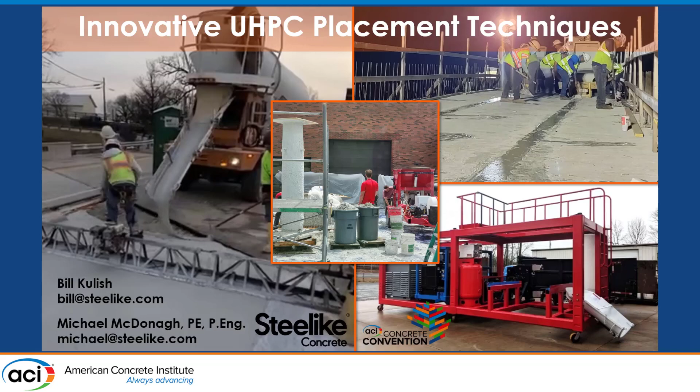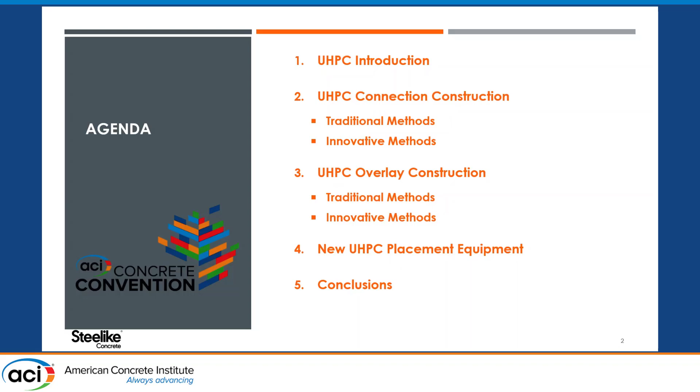First, I'm going to do a very brief introduction of UHPC. Then I'll talk about UHPC connection construction, how it's typically done, our innovative methods, and then do the same for overlay construction. I'll also give a brief introduction to some new UHPC placement equipment that Steelike has manufactured, and then wrap it up.

Now, this session is the third session on UHPC, but nobody has gone back to the basics as far as what is UHPC yet. So I'm going to take the opportunity. I'm sure there's somebody in here who cannot tell me what the typical rapid chloride test result is for a UHPC. Am I right? I see some people smiling. All right, so I'm going to keep it brief.

UHPC is a fiber reinforced cementitious composite, typically with a very low water to cement ratio. We're looking at less than 0.25. The values in yellow or orange would be typical values for conventional concretes used in bridge construction.

22,000 psi is a typical 28-day strength for UHPC. There's significant tensile strength, which depends on the quantity of fiber, and strain hardening, which we've already discussed today. In terms of durability, for a rapid chloride test, typically less than 250 coulombs is considered a requirement for a UHPC class material, versus 1,000 being considered a really good value for conventional concrete.

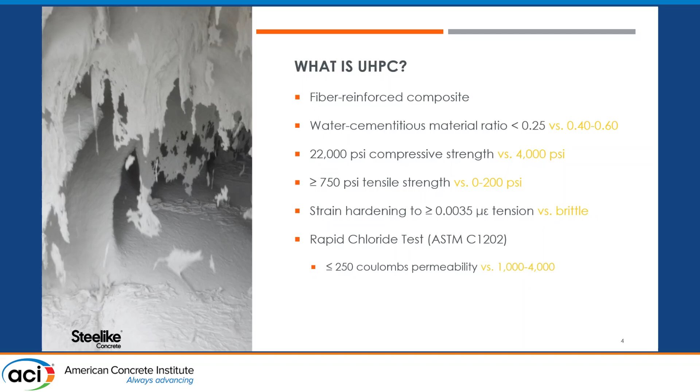I want to also briefly touch on Steelike UHPC, because these innovative methods we've developed, we've only used with Steelike UHPC. So there's a chance there's something unique about Steelike that allows it to happen, or maybe just others haven't tried it yet.

Very briefly, Steelike UHPC meets the Federal Highways definitions and pretty much every agency out there. We're pre-qualified in a number of states, and we have premium properties, which I'll explain in a second. Steelike is also relatively unique by being all white, and we have flexible mixing options and unique placement techniques, which is what I'm going to go into in detail today.

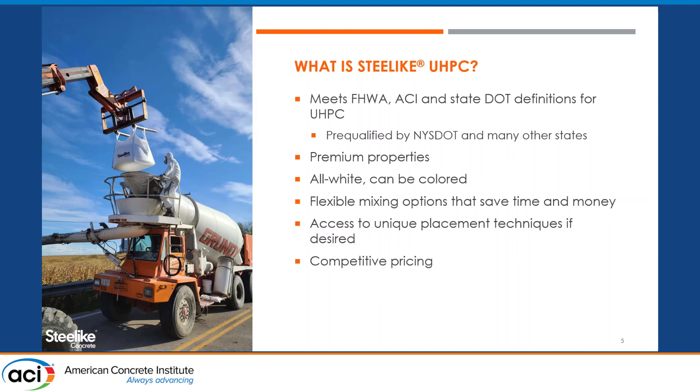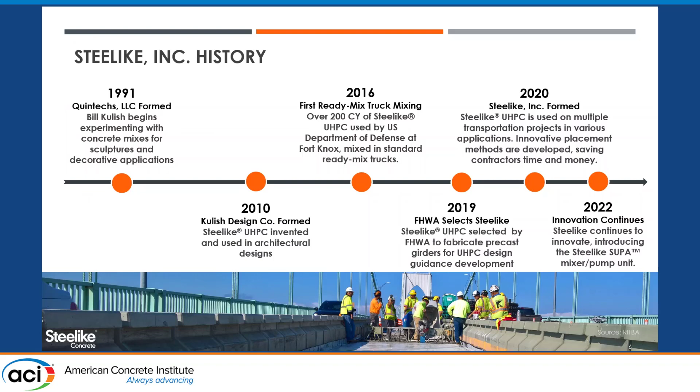Steelike traces its history back to 1991, but Steelike UHPC as we know it today really came together around 2010. 2016 was kind of our breakout year, with a significant project with the U.S. military, and our growth has continued since then.

So my comment about premium properties - on this table on the right, I have lower and upper bound values established by the Federal Highways or New York State, who's been an early adopter, and several properties on the left.

Compressive strength - we've had some lab studies that take our material as high as 27 KSI. Shrinkage, we're certainly on the low end of the range; it's fair to say Steelike is a low shrinkage UHPC. We're extremely low on chloride permeability, and for freeze thaw, our material actually gets stronger as you do the testing, whereas the limit is that it can't degrade beyond 96 or 98% from baseline. And scaling, we don't experience any scaling.

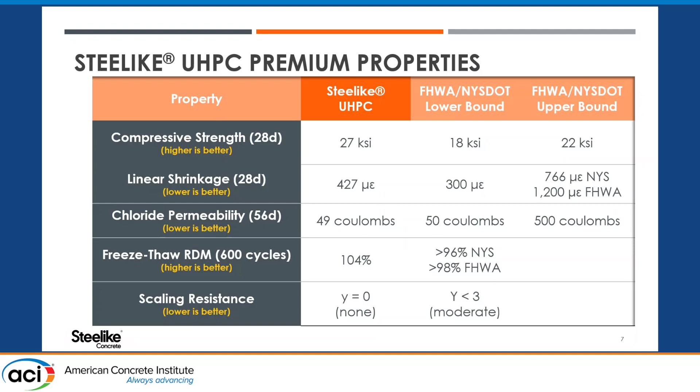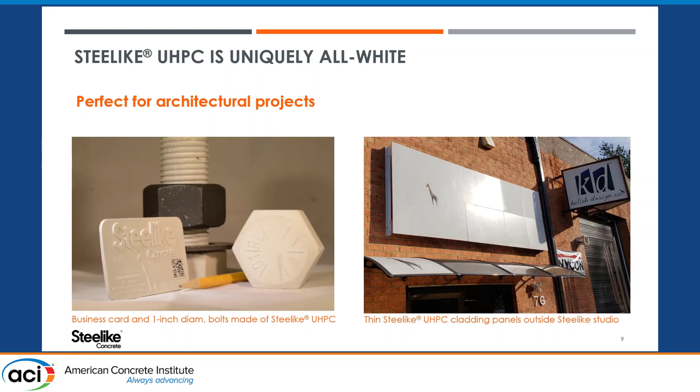Then the connections are placed, then top forms are placed on the connections, since bridge decks are never level in both directions. This prevents the material from running away on the low side, but it also has a secondary effect of trapping air that may be getting displaced or escaping out of the UHPC.

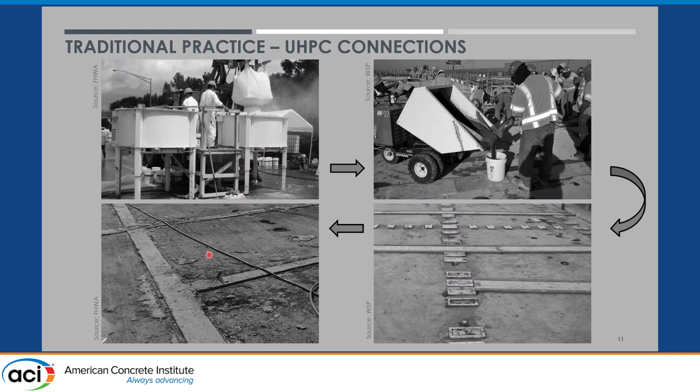So most agencies then say, okay, if you're going to top form, we need to set those forms high, so air that gets trapped as it works its way up is above the deck cross-section. And so when you remove the forms, the bottom left is what you see, and that has to be grinded off.

So with that as the baseline of traditional UHPC construction practices, now I'm going to introduce the innovative methods that Steelike has developed. The first method, key to several other follow-on benefits, is using standard ready-mix trucks for mixing UHPC.

Number one, you eliminate the need to transport specialty mixers around the country to job sites. These trucks are locally available, and they have very large batch sizes. We can mix up to 7 cubic yards in a single batch, versus the typical mixer used for connection jobs, which maxes out around 0.6 cubic yards, with smaller versions from there.

This is something Steelike has been doing since 2015. We've batched well over 1,500 batches in ready-mix trucks, never had a failed batch, and we've done it in all conditions: hot, cold, wet, dry, you name it. So it's a reliable method that we employ as our default whenever we can.

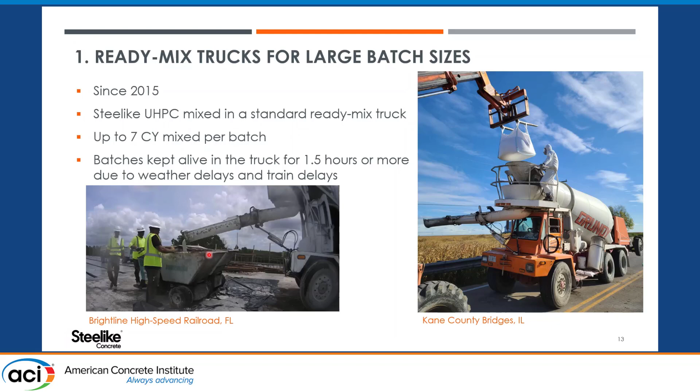We've even managed to keep batches alive when disruptions to projects occur. The slide says an hour and a half or more, but we've actually gone as much as 2.5 hours, and we might be able to go further, we just never have the need. So that eliminates any fear of having such a large batch go bad. There's a lot of money in those 7 yards, but that's never been a concern for us. We have the tools at our disposal to prevent that.

A follow-on benefit of using a ready-mix truck to mix is that the truck is inherently mobile, so now we can eliminate buggies. Buggies can be rather inefficient, they require buggy drivers, you need multiple of those, and they generate a lot of waste.

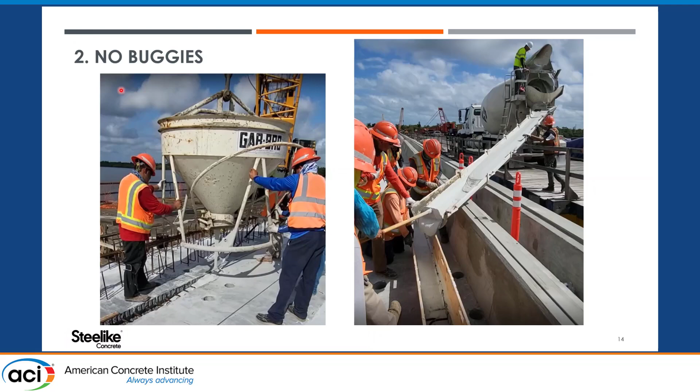And I have a video here taken from the viewpoint of one of our employees standing on the crow's nest of the truck.

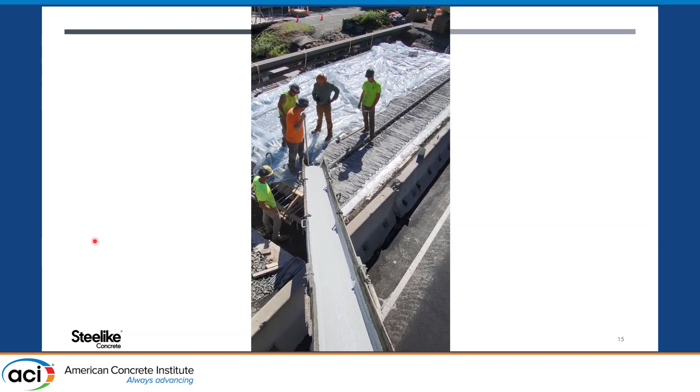So of course they're kind of just getting their groove on, so to speak. But you see they're starting to make more progress, and you notice there are 5 guys in the video, but only 1 or 2 of them are actually doing anything. So it's a testament to the efficiency of this method, as opposed to having 2, 3, 4 buggies, a driver for each buggy, plus the guys at the connection making sure it all goes in.

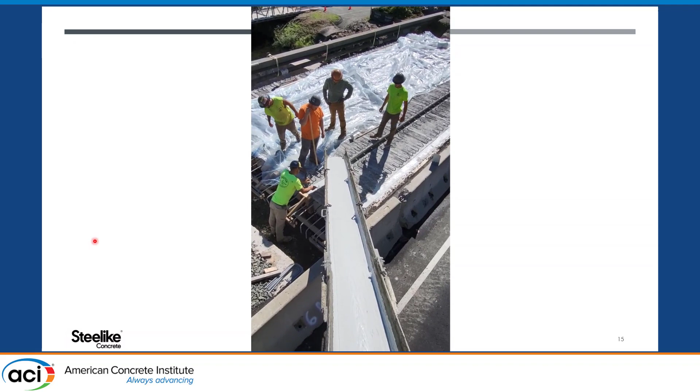I think you get the idea, so I'm going to advance.

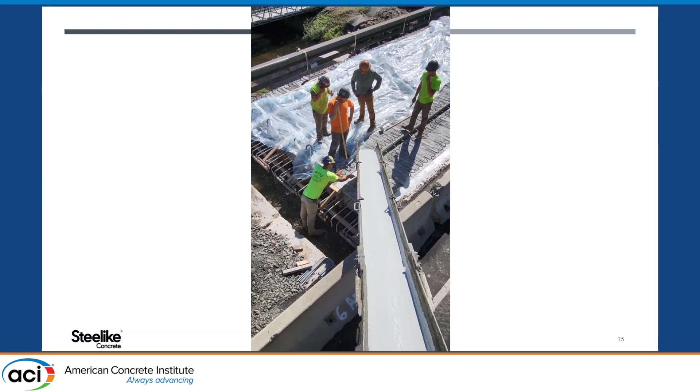So the third innovation, which in this case is not tied to using a ready-mix truck, is the ability to eliminate grinding. You know, I talked about how, because bridge decks aren't flat, you need to top form, and when you top form, you need to overfill to keep that trapped air layer out of your deck cross-section.

So, Steelike, we've learned over the course of many projects that our material can be placed without top forms. We believe this is a property somewhat unique to Steelike UHPC, which is that it stiffens up relatively quickly once it becomes static. So the advantage to that is you can fill up your joint, and depending on the cross slope, maybe it'll start to overflow a little bit, but generally it'll stop before it becomes a problem, if it even flows outside the joint at all.

So this has allowed us and contractors working with our material to just eliminate top forms altogether. And it's kind of a beautiful way of doing it. As Bill, our president, likes to say, it's WYSIWYG - what you see is what you get. You no longer have things hidden beneath the top forms.

So with no top forms, there's no trapped air, no overfill. You're limiting the overfill material, you're limiting the need to fabricate top forms. And probably best of all, from an environmental standpoint, you're not grinding and creating those plumes of dust, sending those into the environment.

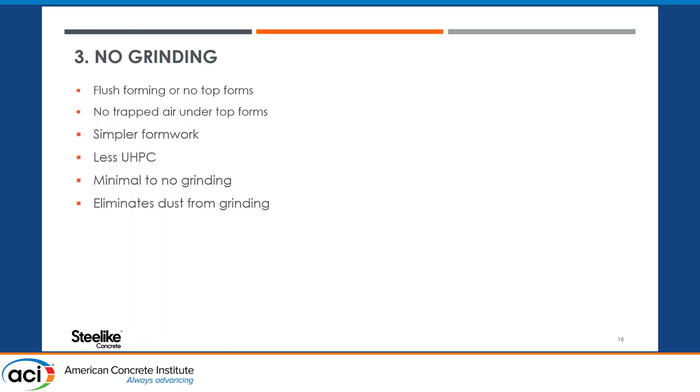Now, sometimes if slopes are too steep, or if the temperature is too cold, we still need top forms. But we've learned that we can still set those forms flush, wait for the material to stiffen up a little bit - it just takes a little bit longer if it's cold out, for instance - and then we can still remove the forms and do any touch-ups if we need to. And then once again, no overfill, no grinding. So we've found that has also been an efficient process that has saved contractors.

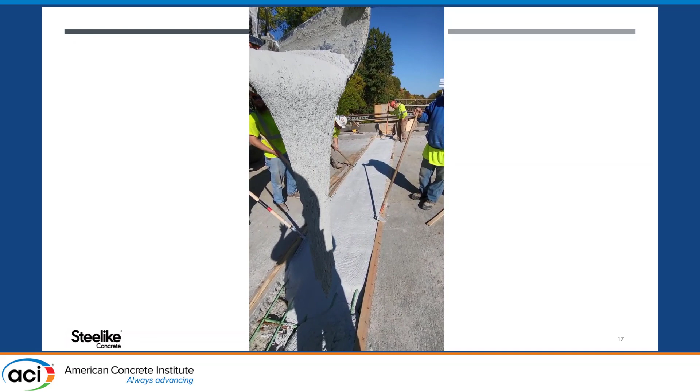This is a 7% pitch - well, I guess that's longitudinal - and then it's got a 2% pitch. As you can see, there's no top forming. The boards are just there because the state didn't think it was going to work, so we're not even touching those 2x4s.

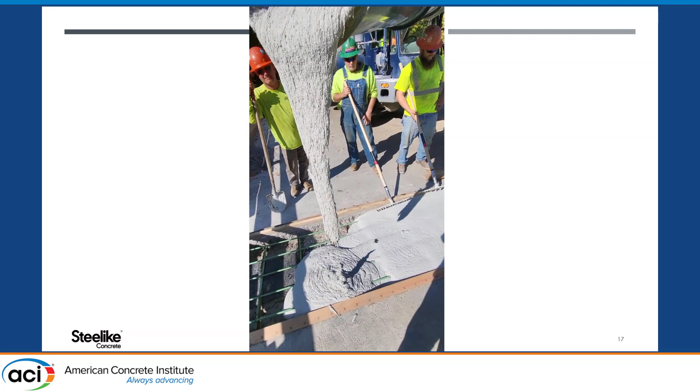The recent job, as Bill's voice in the video said, had a 7% pitch longitudinal, so transverse to the link slab, and then it had about a 2% cross slope. And as you saw, no top forms and no need for top forms.

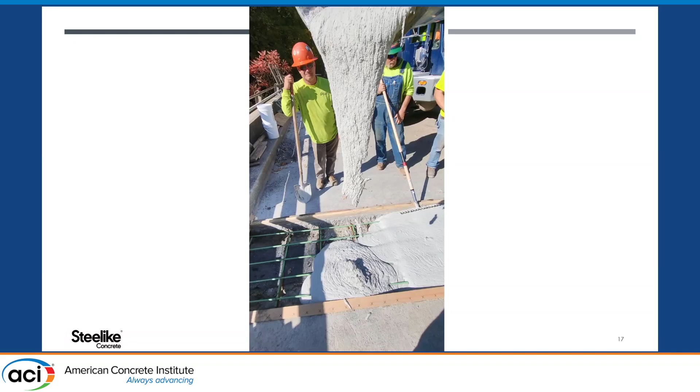All right, so now I'm going to go through the same process with UHPC overlays, because these are really the two main applications of UHPC that are getting the most use currently.

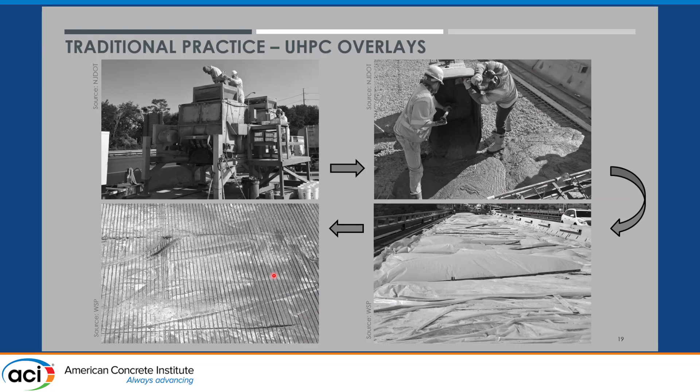So it's kind of a shame when that happens, because here you have this extremely durable material that could last 100 years. Well, now you have these defects, even if they're just aesthetic, that are going to be there for the next 100 years.

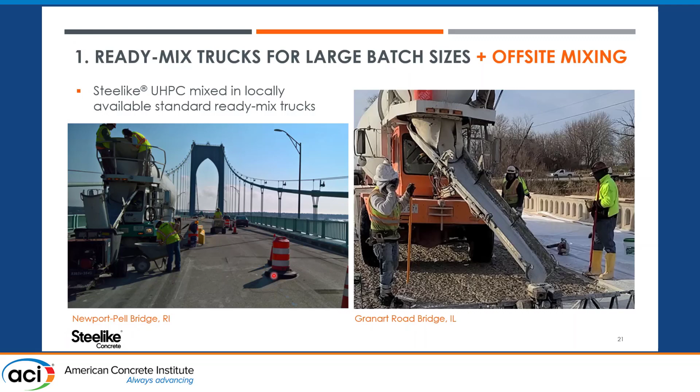Once again, mobile ready-mix truck means you can eliminate the buggies. And for overlays, this works exceptionally well because I have a hard time thinking of a situation where you can't just drive the ready-mix truck onto the deck to discharge it. The only case might be if you're doing a really deep overlay where you're going below the rebar mat.

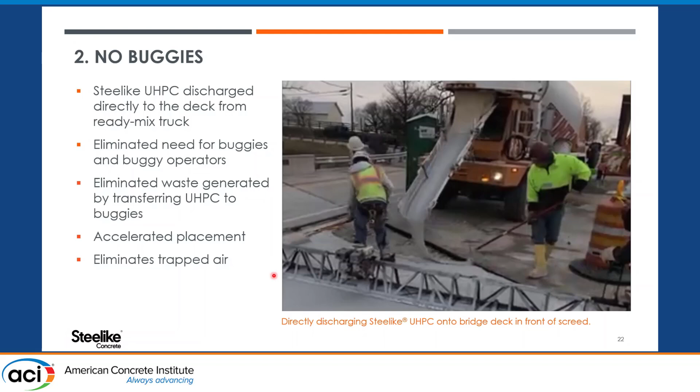So once again, by eliminating buggies, you're reducing labor, reducing equipment, you are reducing the waste generated by those buggies and accelerating everything, and potentially also...

All right, here's the last 3 or 4 feet. There we go. The video is still playing now? Okay, good. So,

You're also greatly reducing, by using this method—so you see the truck just drives right up to the screed and just lays down a ribbon of UHPC. By doing that, as opposed to buggies that are dumping large piles, you're also greatly reducing the risk of trapping air under the placed UHPC.

And now I've lost my presenter screen here. I got it.

So you can see the chute kind of waving back and forth, placing the UHPC.

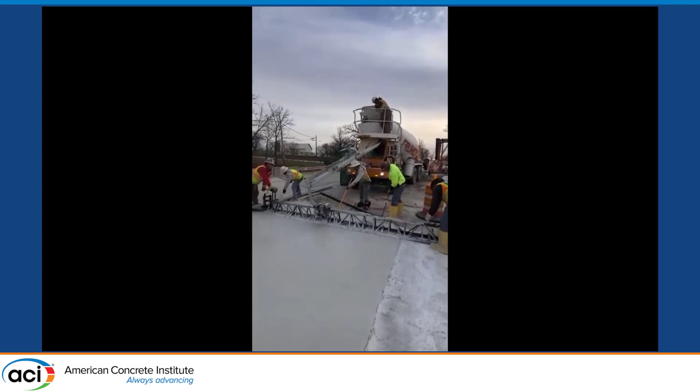And once again here, take a look at the number of workers that are there. There's one on each end of the screed, making sure it's advancing. And 2 or 3 guys with rakes. So it's a very efficient way of placing UHPC overlays.

All right, and then finally, elimination of plastic sheeting. Steelike has been doing this since 2020, so for 2 years now, and we are curing overlays with just curing compound. We found that it works, and it eliminates all the risks of using plastic sheeting.

As I mentioned before, having deep impressions that are stuck there for potentially the next 100 years. There's also potential safety concerns, because if you're doing a project with staged traffic, maybe unexpected wind gusts could come up and blow the sheeting into traffic, potentially. So if you just get rid of the sheeting, all those risks are eliminated.

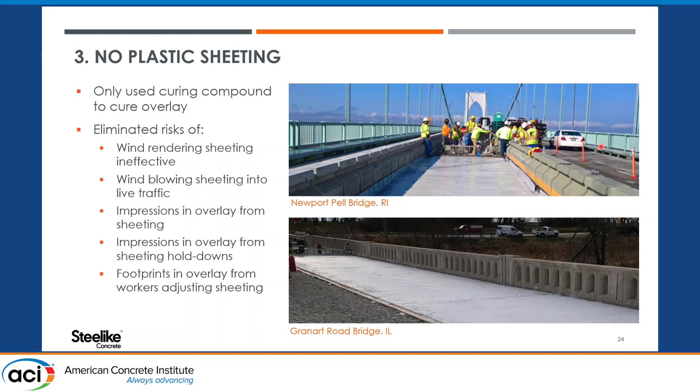Now, I've seen recently that another project has started doing this with another material with no plastic sheeting. So I think that's a great thing, and I'm glad they're following our lead.

So I'm running out of time here. I have some slides here about some new placement equipment, but I'm going to leave that to the presentation. We have another presentation, not next, but the following one, where I can really go into detail on that, and I'll save that for then.

And yeah, so I just have some quick conclusions, really just reviewing everything that I presented. That the new methods that Steelike has introduced is mixing in ready-mix trucks, and then taking advantage of the mobility and the large batch sizes that provides to really make UHPC placement more efficient. And then for connections, eliminating diamond grinding.

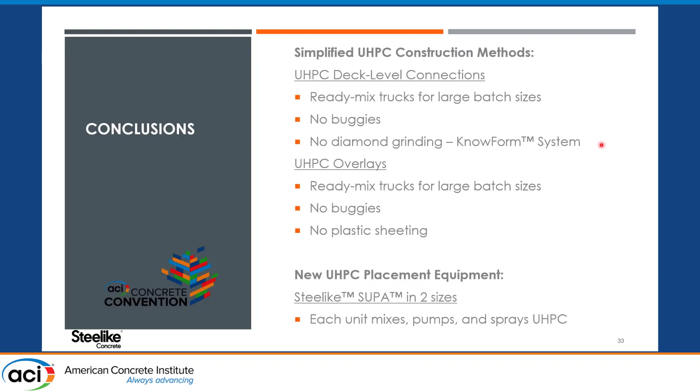We like to call it the KnowForm system, with kind of a pun on the word no, because there's no forms, but you also know what's going on. And then for overlays, again, taking advantage of the ready-mix trucks, the mobility, the large batch sizes to eliminate buggies, and then finally eliminating plastic sheeting.